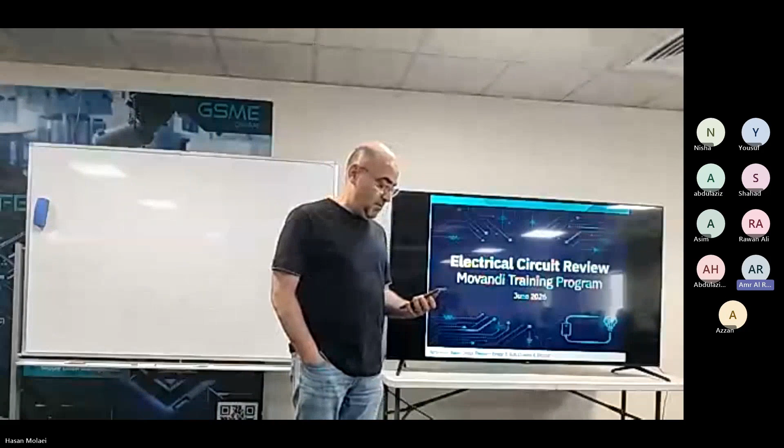So some of you, or some of the others in the group, were complaining that the speed is too much. Right? Saying it's too much work, right? Anybody here? Don't be afraid. Can you raise your hand if you believe that it's too fast?

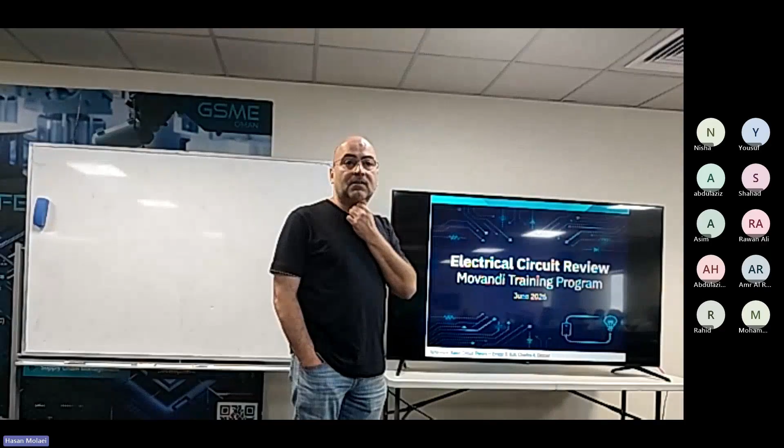Anybody who believes the way we are pushing forward is too fast, let us know. None of you think it's too fast, huh? You think it's too fast? It's okay for the speed, but there's a lot of assignments. Like, we need to recap what we took, because I graduated 2 years ago. So now I need to recap everything from maybe 2020.

Exactly. That's the whole purpose, recapping. Yeah, so I don't know if I should focus on my lessons, or solve the assignment, or prepare for the exam. There is no way to prepare for the exam before you review the course and do the homework, right? If you review the course and homework, you are prepared for the exam.

I think the assignments need to be questions for the students if they want to exercise for the exam. It's the same thing. It's about knowing the game. When you start knowing it, then you are prepared for the exam. Because there's 3 assignments in 1 week. It actually should be 5 assignments in 1 week. Last week there was only 3. It's going to be assignments for every day.

So what we can do, because remember, I kept repeating the philosophy: the purpose is to maximize your learning and foundation. Some people may want to go faster, some slower. If the speed is too much, we can probably replicate the same class. It's not about the speed, it's that the assignment has too many questions. My suggestion is one assignment with multiple questions for the whole week.

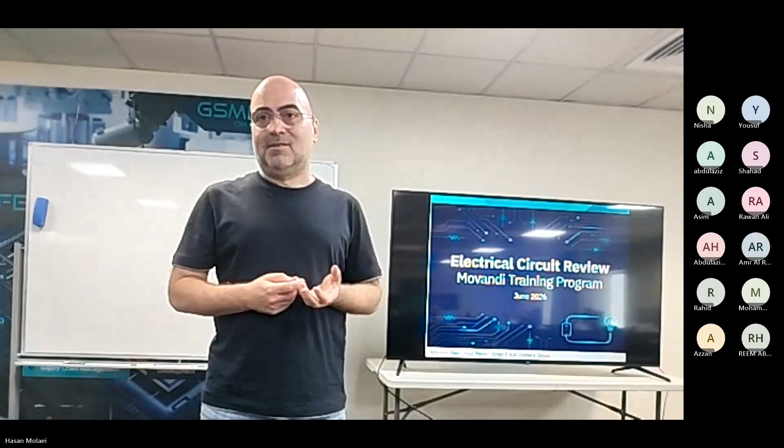So our purpose is to make sure that whatever you learn is high quality. Yes, we were planning to pack a certain amount of material in the 2 months to maximize your outcome. But if that sacrifices the quality of learning, we can adjust the speed. We also understand backgrounds are different, and people may have different levels of interest or time to attend.

Reading your messages to Dr. Hasan, I was thinking maybe we can create a slower track as well for those who want to learn at a slower pace so they don't fall behind. Of course, those who go slower will cover less material in 2 months.

My idea was that in 2 months we finish 5 general areas: circuits, basics of devices and electronic circuits, signals and systems, control and feedback, and electromagnetics. Now, if we slow down, in 2 months we will not be able to cover all of that.

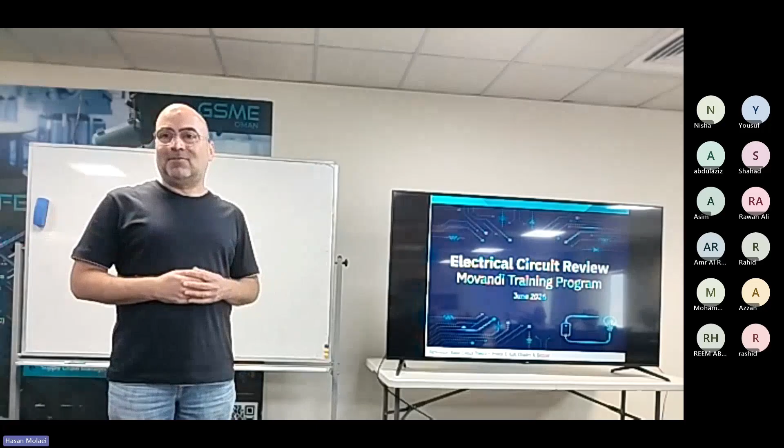But the other way is to basically give the option. The ones who want to go fast, we go. The ones who want to slow down, maybe we cover 3 topics. And then we can repeat the rest of the things for them later on, online or whichever way, if they want to read. But the whole purpose is just making sure that your foundation becomes solid.

And then later, when we go to the follow-on courses, of course, again, it's important to start on a solid foundation, but then if people don't have time to follow all of it, maybe, for example, for those who go more slowly, we finish the foundation instead of 2 months, we finish it in like 3 months, 4 months. So they may be missing the first, maybe the digital course, and then they will start with the analog course or whatever later on. So that we adjust the pace for everyone.

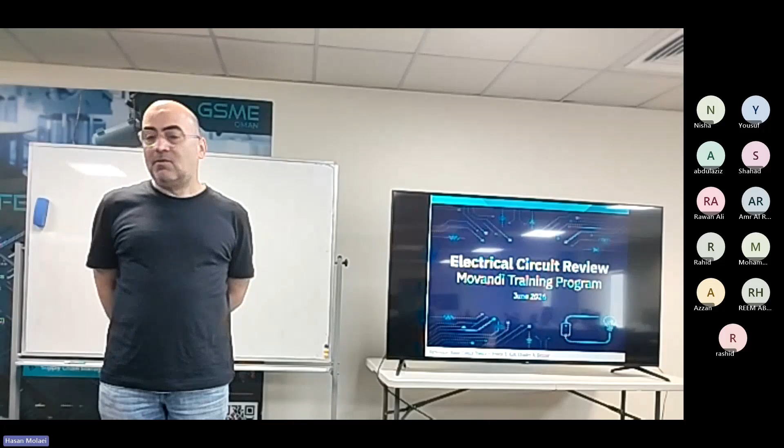That was my thinking. Now, let's say if I give you 2 options, the current speed and the slow speed, which one do you think? You go reduce speed. I want to understand what works best. Because at the end, all we care is how much you have learned. We need to balance the assignments and the amount of materials that we use.

Because if we have a lot of assignments in just 1 week, most of us will just rely on ChatGPT to solve them, and I won't. But if you use ChatGPT, you don't learn. Yeah, exactly. So 1 to 2 assignments in a week is perfect. It is not like how many topics we need for the assignment. A suggestion. You just don't do assignments.

If you're okay with this, instead of giving these homeworks as assignments, we say these are the things you have to know and you have to practice by yourself. If you have questions, come and ask. Much better. But if you fail in the exam because you haven't been able to solve the problem by yourself, because in the exam you don't have that GPT, we just give you feedback. You say, okay, first round you failed. We are happy to say, okay, go study again and come back and do another exam 2 weeks later.

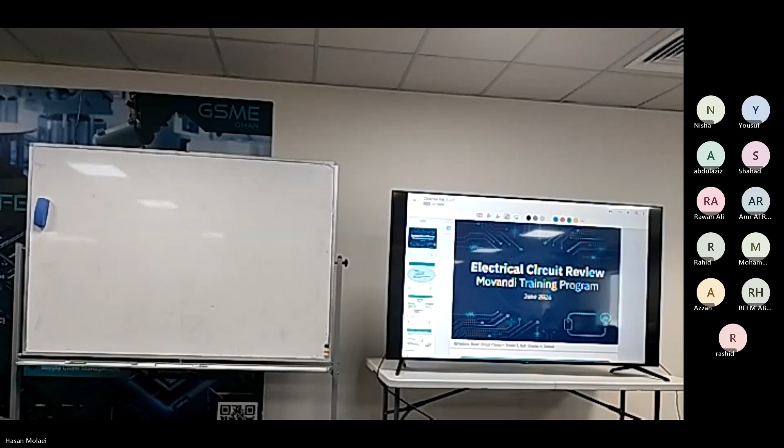You can keep taking exams until your foundation is solid, but we will not pass you unless you are able to solve the problems. Right? Because the exam is only a measure for yourself on whether you are comfortable enough with the material. Right? There is no failure. It's only success. But the success may require more time. Does it make sense? Will it make it attractive?

Okay, so moving forward, anything that you call assignment. I think we still should keep the option of assignment. So we just say review problems, and then some of them we will announce as assignment. Does it make sense? So some of them. You are happy with that? No, so some of the homeworks you announce it as assignment. Then they have to. Because we also owe you to give you feedback that you are progressing and you're doing the work.

We can make it very easy. We can say, okay, you don't need to come to the class. You can go review by yourself. It's self-learning at the end. That's okay. The class is here to help. The assignments are here to help. And the exam is there to help you measure it. We just try to remind you what are the topics that you need to know. We cannot make you know it. You have to learn it by yourself. You can explain, you can help, but at the end it's yours. Any opinion? What should we do? Yes.

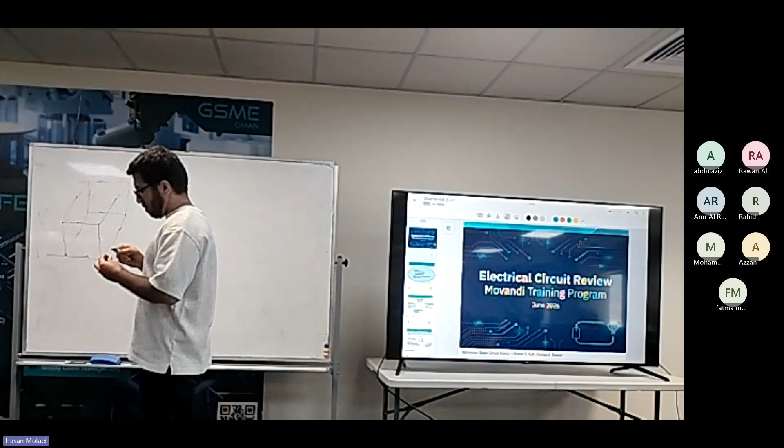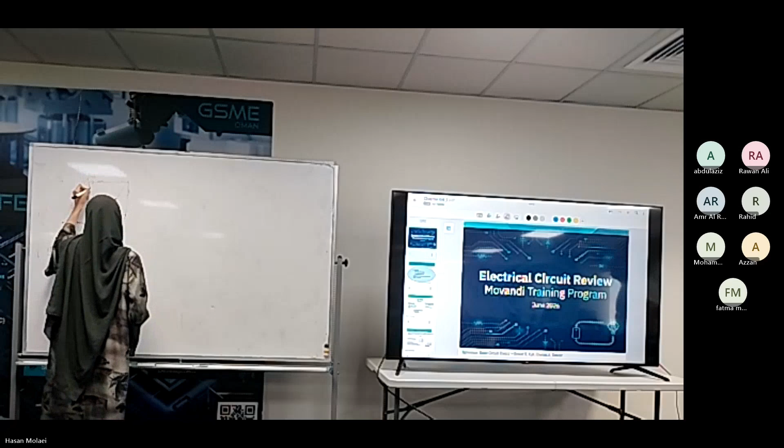That's part of the assignment. Since most of you solved the assignment and sent the answer, I want one volunteer to solve it for us. I think more than 40 people sent the answer. I want to check how confident you are. One of our good ChatGPT users, we invite you to come here and repeat what ChatGPT did. Yeah, I think we can explain that. The kinds of... all, yeah. Is it true? Is it correct?

The paths, that means the way these paths come from here to here, are they the same? Then we can easily divide the current by 3. Yeah, but you are using symmetry. How did you find that all currents should be equal? Because it is symmetric. All is equal, but you know, in the last assignment, the last step, it was here. From here to here, all these paths are here.

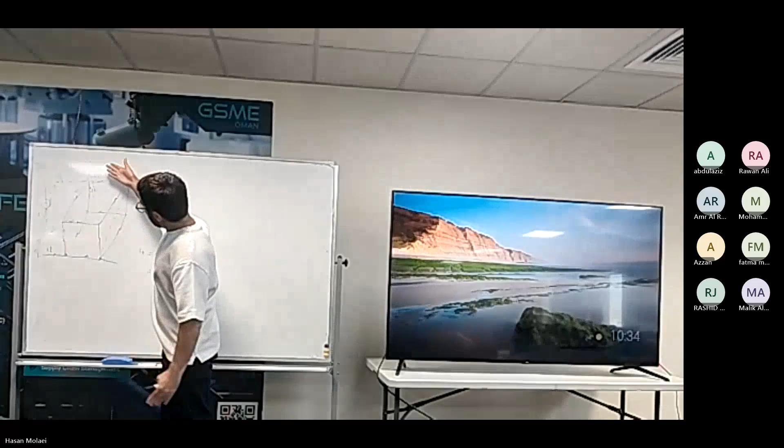This voltage be equal to this one, yeah. Because this path and this path both are same. I'm looking from this node and this, yeah. If you consider a diagonal plane that crosses this node and this, let us say green plane. I'm showing. I draw.

So in this plane, regarding to this plane, this point should be equal to this point. They are mirror. Okay. This node is mirror to this node. That means you can easily short them together because they are same, they have same potential. If we connect these two nodes together, what will happen? Absolutely.

These two resistors are, what's the relationship between these two resistors? They are parallel. I can write one here. These two are parallel, I can write R over 2. These two parallel, R over 2. This one and this one.

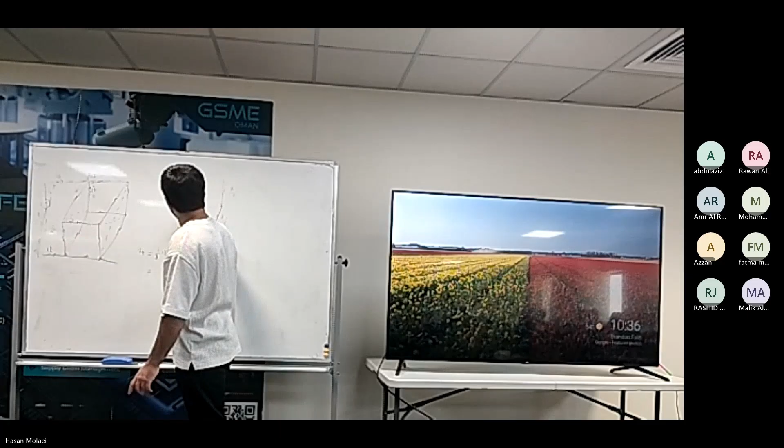Again, both terminals are connected together. They are parallel. This one and this one. Again, parallel. This one. And these two are again. Now you can find easily the equivalent resistor of how

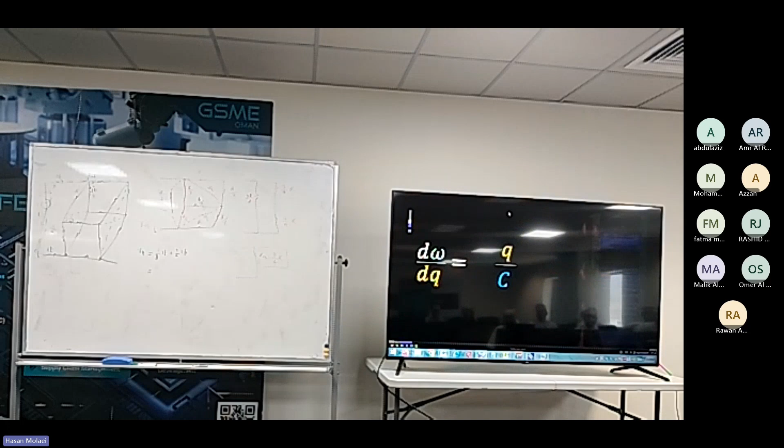You'll be able to visualize the entire process and even derive the energy stored in a capacitor. Let's jump right in. Understanding capacitors. Imagine a capacitor as a tiny

Hello, students. Today, we're not just going to learn about capacitors. We're going to feel what happens inside them during charging and discharging. By the end of this video, you'll be able to visualize the entire process and even derive the energy stored in a capacitor. Let's jump right in. Understanding capacitors. Imagine a capacitor as a tiny supercharged battery. It has two metal plates separated by a small distance d.

Keep in mind that capacitors are electrically neutral. This means that for every positive charge in the capacitor, there is an equal amount of negative charge as well. However, in our presentation here, we will only show the conventional direction of current. Let's imagine we connect a 9-volt battery to a capacitor. Here's what happens step by step.

As soon as the connection is made, the battery starts hustling positive charges from one plate to the other. Each little charge, dq, needs some help from the battery to make the journey across. Initially, at the start, the capacitor's potential is 0 volts, while our battery is a solid 9 volt. The first few charges move easily, but as more charges pile up, the capacitor's plates start pushing back, saying, hey, we're full. The battery has to work harder to move more charges, building up potential energy in the capacitor.

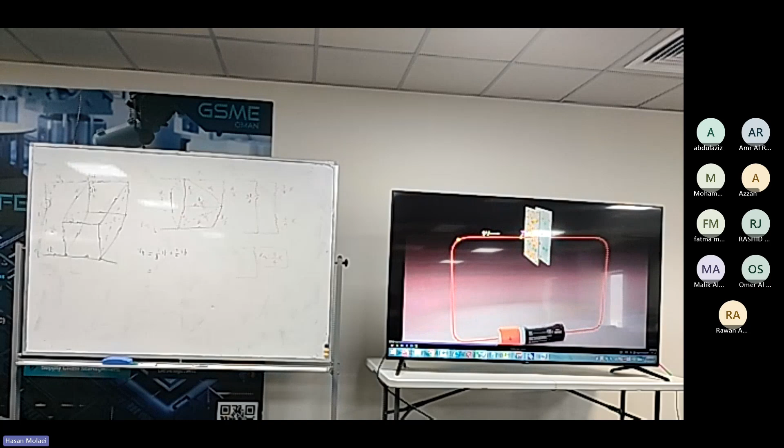If we think of the capacitor as a tiny battery, positive charges want to flow from positive to negative terminal of the capacitor, or we can say it wants to make the charge flow counterclockwise. But because the potential of the battery is higher, or rather the power to push the charges is higher, the battery will succeed in moving the charges clockwise until the voltage of the capacitor is comparable to that of the battery. An electric field forms between the plates, opposing further charge movement. This field grows stronger as more charge accumulates.

We know that the work done per unit charge is equal to the potential, which we call V. Additionally, you know that the voltage across the capacitor is related to the charge Q on the capacitor and its capacitance C by the formula that says voltage equals charge Q divided by capacitance C. When we substitute Q by C into the equation for work done, we get work done equals Q by capacitance multiplied by dQ. We know that the total work done by the battery to insert charges into the capacitor is stored as the potential energy of the capacitor.

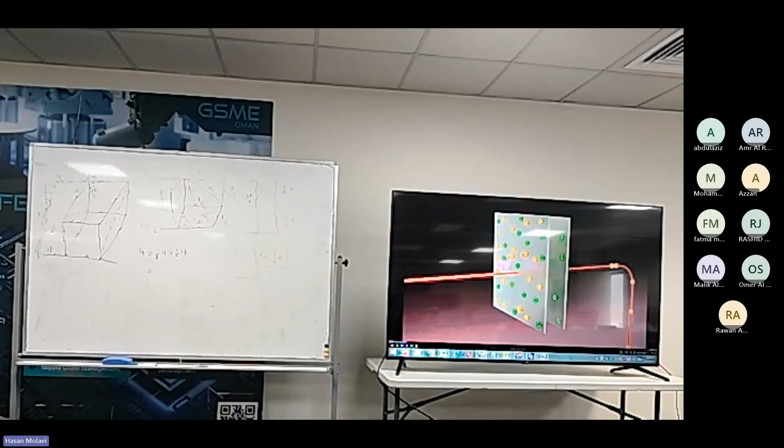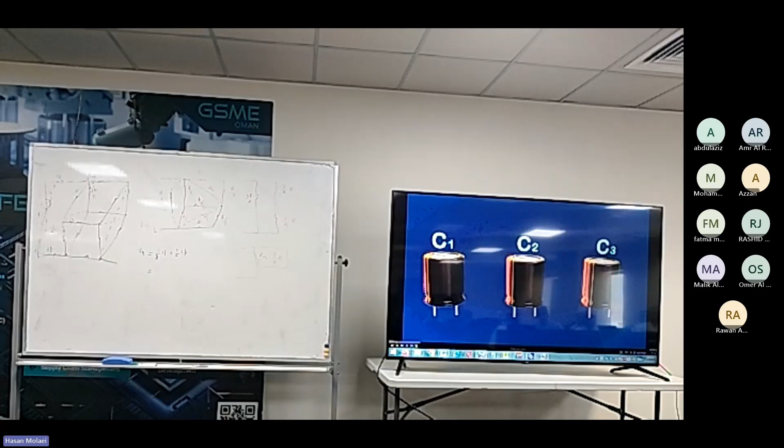In previous videos, we explored how capacitors work and their capacitance equation, but in real circuits, a single capacitor isn't enough. Devices use capacitor combinations to store more charge or handle higher voltages. Let's understand how these combinations work and why they're so important. Imagine we have 3 capacitors, C1, C2, and C3, connected in series. But what does a series combination mean? It simply means that the capacitors are connected one after another in a single path, just like a chain.

Now let's connect a battery to this series combination of capacitors. As soon as we do this, the battery pushes a certain amount of positive charge, Q, onto the first capacitor plate of C1. But here's where things get interesting. The positively charged plate of C1 repels the positive charge on the adjacent plate. This repelled charge moves away, leaving an equal amount of negative charge on that plate.

Now, the positive charge moves forward to the next capacitor's plate and repeats the process. The positive plate repels the positive charge of the next plate, making it negative. The plate that loses positive charge becomes negative. This chain reaction continues across all capacitors in the series.

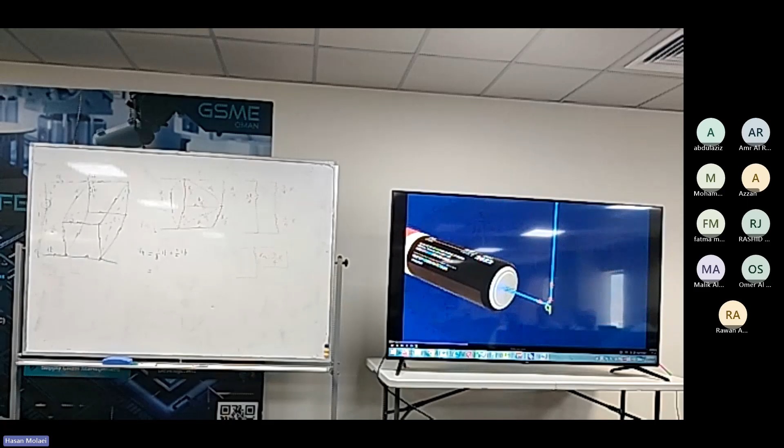Finally, when the last capacitor's plate sends its positive charge to the negative terminal of the battery, the circuit is complete. The same charge that the battery supplied from the positive end now reaches the negative end, maintaining a continuous flow of charge. This unique charge transfer mechanism ensures that all capacitors in a series combination have the same charge Q, which is a key property of series circuits.

I got a lot of questions regarding that: positive charges do not move. So here is the explanation from the perspective of electrons, not from the conventional current perspective, but from the movement of electrons, which are the real charge carriers.

The battery's negative terminal pushes electrons onto the nearest plate of C3, making it negatively charged. These extra electrons repel electrons from the opposite plate of C3, leaving it positively charged. The repelled electrons move to C2's plate, making it negative, and push electrons away from its other plate, making that positive.

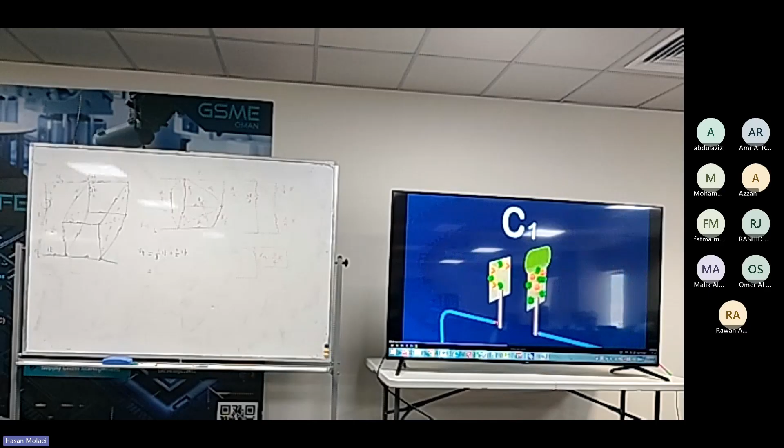This chain reaction continues. The electrons move to C1's plate, making it negative. The last plate of C1 loses electrons, becoming positive, and the freed electrons are pulled into the positive terminal of the battery. As a result, every capacitor has the same charge.

Here's an important point to note. All capacitors in a series combination have the same charge, Q. While the charge, Q, is the same for all, the voltage across each capacitor is different based on their capacitance. We can express this as voltage across capacitor C1: V1 equals Q by C1. Voltage across capacitor C2: V2 equals Q by C2. Voltage across capacitor C3: V3 equals Q by C3.

That's a series connection. The total voltage, V, is the sum of individual voltages. V equals V1 plus V2 plus V3. And here this V is the voltage or potential difference of the battery. When we connect capacitors in series, we want to find a single equivalent capacitance, CE, that behaves the same as all the capacitors combined. To find this equivalent capacitance, we start with the definition of capacitance, which is CE equals Q by V, that is, charge stored per unit voltage.

Now, in a series connection, the total voltage across the combination is this, which we have just calculated, and charge Q stored in each capacitor is the same. Just after simplifying the equation, we will get 1 by CE equals 1 by C1 plus 1 by C2 plus 1 by C3, and so on to the n number of capacitors, 1 by Cn. This gives us the formula for equivalent capacitance of a series combination.

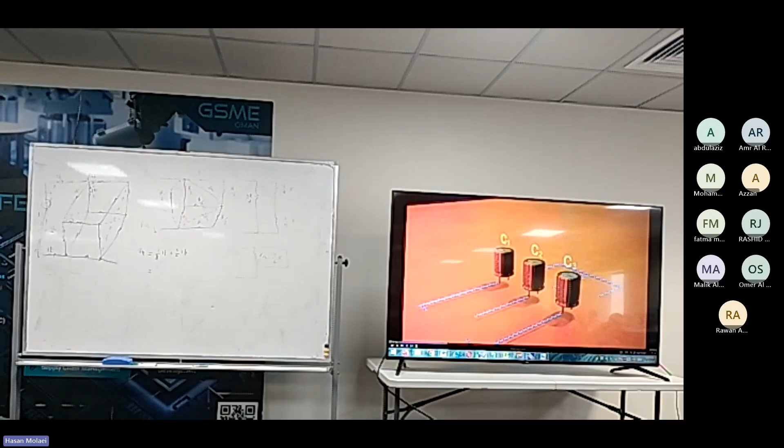All right, let's visualize how a parallel combination of capacitors works. Imagine we have 3 capacitors labeled C1, C2, and C3. Now, in a parallel setup, these capacitors are connected side by side, all joined together at one point. Now, here's the key difference between parallel and series combinations. In parallel, when we connect these capacitors to a battery, the voltage across each of them is the same. There's no voltage drop between them. This is because all the capacitors share the same connecting points, like being on the same level in a way, no matter what. Can you believe this? That means the voltage across C1, C2, and C3 will be exactly the same as the battery's voltage.

But hold on, how much charge will each capacitor hold? Well, that's where things get interesting. When the battery pushes charge into this parallel circuit, the charge doesn't distribute evenly between the capacitors. It's actually based on their capacity to store charge. As the positive charge accumulates on the first plate of each capacitor, the same amount of positive charge is pushed back into the battery from the second plate, like a beautiful balance of give and take happening inside the circuit.

The charge each capacitor stores depends on its capacitance. Just imagine, one capacitor might hold a lot of charge easily, while another with lower capacitance will store less charge. So here's the thumb rule. In a parallel combination, the voltage is the same across all capacitors, but the charge stored in each capacitor will vary depending on their individual capacitances.

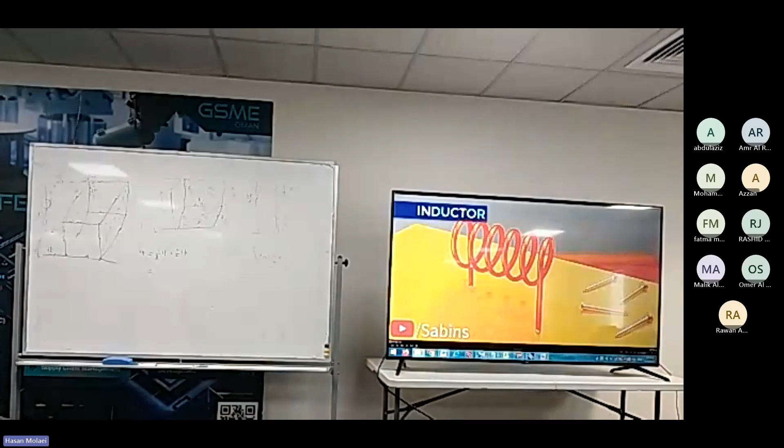An inductor is a very interesting device in that when you simply connect a DC power supply across it, it acts as a magnet. It has many applications across all engineering disciplines. Let's take a logical look at the physics behind inductors. A current-carrying conductor produces a magnetic field around it, as shown. Let's do an interesting experiment. Let's bend the wire.

As you bend the wire, the magnetic field lines interact with each other and produce an interesting magnetic field pattern, as shown. This magnetic field pattern is similar to that of a permanent magnet, which is why a current-carrying loop acts like a permanent magnet. Clearly, simply by increasing the number of loops, we can increase the magnetic flux. We can also increase this magnetic flux by increasing the current through the coils.

A constant called inductance connects the magnetic flux and the current's value. The value of inductance depends purely on the geometry of the coil. Now, for the most important part of this video, what will happen if the current through the coil changes? When the current changes, the magnetic flux that the coil produces also changes, which means we need to study the effect of this varying magnetic flux on the coil.

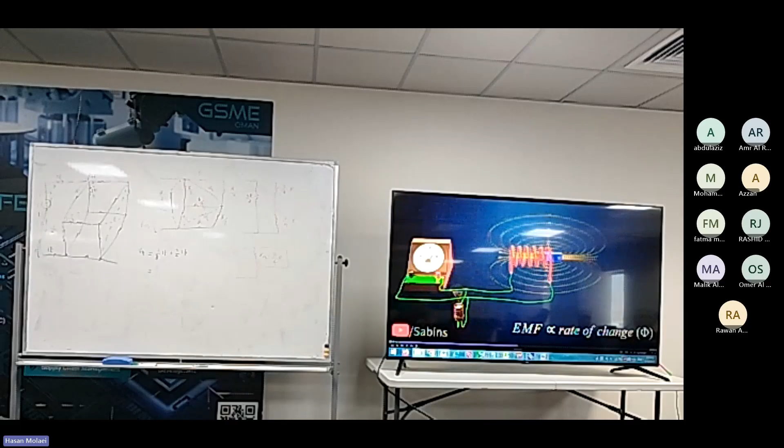To study the effect of varying magnetic flux on a coil, we need to introduce Faraday's law. The great scientist Michael Faraday said if the magnetic flux changes across a loop, it will induce an EMF across it. Here you can see that the permanent magnet approaches or leaves the loop. It will induce an EMF across it. This result occurs because the movement of the permanent magnet causes a varying magnetic flux on the loop.

Now, let's apply Faraday's law to an inductor connected across an AC power supply. According to Faraday's law, the varying magnetic flux that the AC power source produces will definitely produce an EMF across it. This EMF is known as back EMF, and this phenomenon is called self-induction.

The electricity we use everywhere is sinusoidal in nature. It's therefore very important to study the effect of a sinusoidally varying EMF across the inductor. You might have noted that in Faraday's law, everything is about the rate of change. So let's study more about a sine curve's rate of change.

Clearly, for the sine curve, the change is zero when the current is at the peak, and the change is maximal when the current is zero. This is one interesting property of a sine curve. The EMF it induces is proportional to the change in current. Therefore, the EMF across the inductor is zero when the current is at maximum. And the EMF is at maximum when the current is zero.

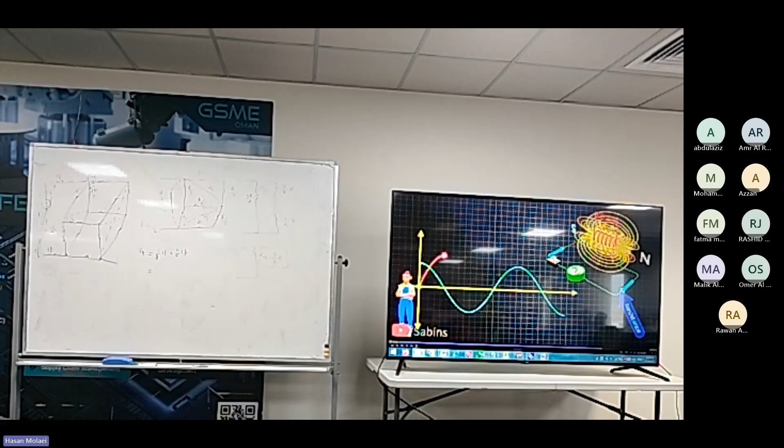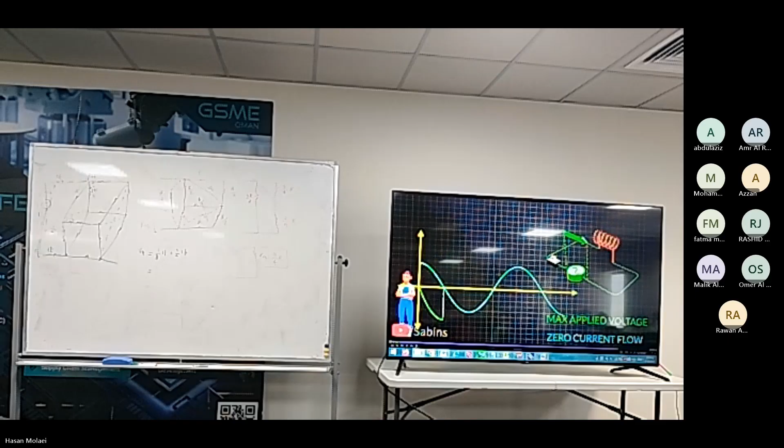In short, the back EMF will vary as shown. If the resistance of this circuit is negligible, the EMF induced across the inductor should be equal to the applied voltage, but opposite in sign. So the applied voltage also has the same variation with the current. When the applied voltage is maximal, the current through a pure inductor circuit will be zero. And when applied voltage is zero, the current flow through the circuit will be maximal.

In short, when a sinusoidal voltage is applied across a pure inductive circuit, the current will lag the voltage by 90 degrees. This is a crazy behavior. However, using the fundamental laws of physics, we have explained the reason behind it. We hope you have developed a good conceptual understanding of inductors.

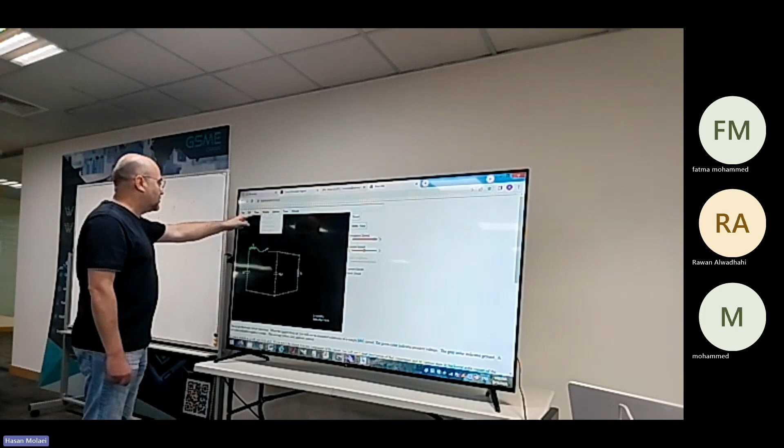Can someone search quickly, see where you can actually create how to plot the? You have to select the. Where's the plots? We should be able. Oh, it's here. So go to the draw. I just saw the voltmeter. Let's start from the beginning. So here there is no sub menu. Let's start from passive components.

You see a voltmeter here. So let's go to inputs and sources. Of course, should be here somewhere, right? Then go to outputs and labels. See, they have ohm meter, they have watt meter, amp meter, right? Oh, okay. So add a voltmeter and amp. Okay, here, add voltmeter. Put a voltmeter here. This one should be zero. Connect it the other side. So one side to the one side.

Put it vertical. See that, yeah. So you see, one of the things that you also have to become good at is drawing circuits. You have to see the circuits and see how they are, follow the standards. You basically have to put it vertical. Okay, put it in. Connect this side, this side, this side. Up to here, bottom. Right. Remove them there.

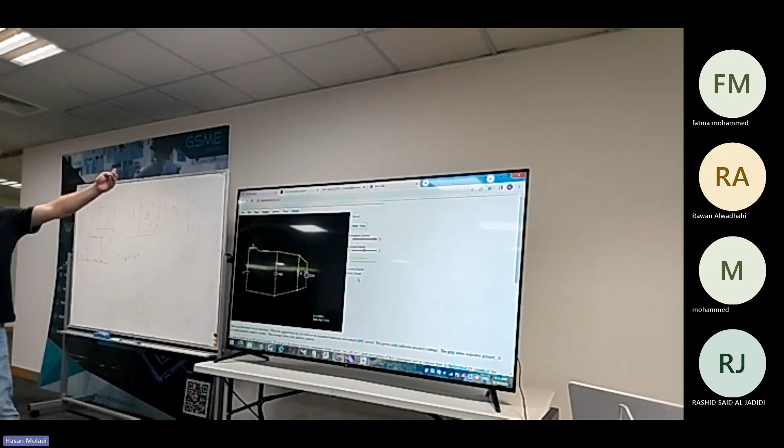Okay. So this one, I'll click on it, see what is the option that it says. Voltmeter. Series resistance. That's good. It's scale auto. Okay. Apply. Fine. Let's run it again. All right. So this voltage, see, arrives at 0. Right? Now close the switch. It goes up around that too. Right? So reduce the speed now, so you can actually see it, then you can come back to plot it.

So okay, let's do it again. See, first of all, the voltage is coming up gradually. Why is the voltage coming up? This capacitor is getting charged. While it's still getting charged, there is still current going. But when it reaches 2.5, you will see the current here totally stops. All the current will go from there. From theory, we could understand that at the end, when it reaches the full voltage, the current is going to be zero. KCL here says the whole current that goes in goes out. So basically it becomes like just two resistors in series connected to a source. See, 2.2, as it reaches 2.5, it's going to be slower and slower.

So what was the time constant that you calculated? 10 milliseconds, right? Now, the actual charging time constant here is not 10 milliseconds. You know why? There's another resistor as well. So what is the time constant of this circuit? From the capacitor's perspective, it's as if two resistors are parallel to each other. So we actually have 5K resistors. So the time constant is 5 milliseconds, not 10. So you want to make it 10 milliseconds with this topology. How do you do it? No. Each of them increase it to 20K.

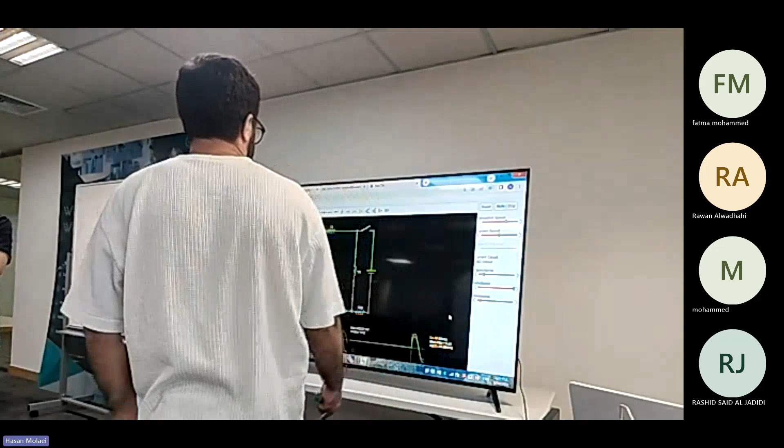So Sakar was coming to me asking that, oh, we already know all of this, I want to go practical. Fine, but it's pretty much like driving, right? You can say, in order to drive a car, you open the door, you sit inside, close the door, turn on the car, press the brake, put it in gear, push the gas pedal and go. Okay. But that doesn't make you a driver. You have to practice to be able to do all those things quickly. So same with setting up the simulations.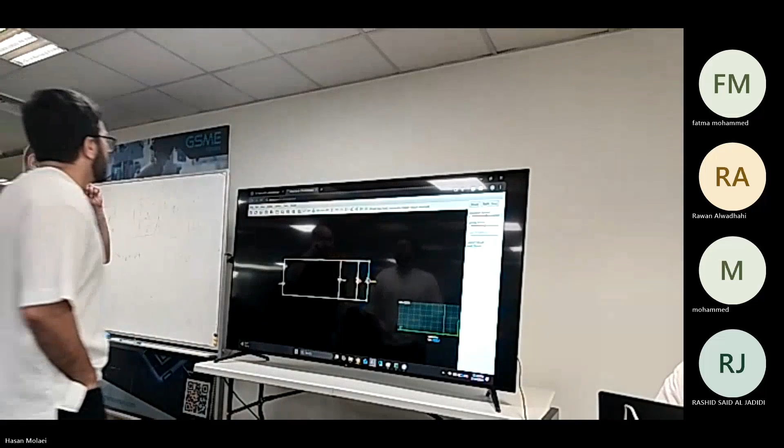This is not what we wanted to show them. It's too complex for them. You just want to understand how to copy the plots. How does it do the plot? Show values. Show options, show values. Yeah. Working with that. Found it? You have the menu up there as well. Too many options. Browser setting as well. We need to be probably just on the toolbar, but we need to see the values. You had the plot there, right? Yeah, only for the first one, that's the only way to show. But how do you establish it to stay?

Good. So now we have a 10 millisecond time constant. Turn off the switch. Then turn on the switch. Please. Reset and start from fresh. Okay, turn off the switch first. Oh, actually, reset. Okay. So now start. First of all, you see, let it deplete. See, it's going down. So we have to speed up the simulation so that you don't have to wait. Go a little faster as well. Okay, good. Now switch it on.

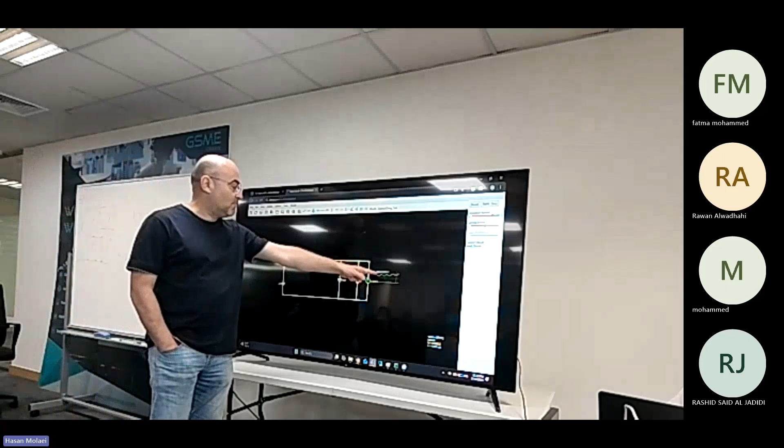See? Now switch it off. Now switch it on again. Now switch it off. On again. Off. Now keep doing it faster. On, off, on, off, on. Now try to keep it around the line 1 by switching on and off. Bring it down to 1 and keep it around 1. Don't let it go down. Your job is going to be keeping it around 1 with minimum divergence. You're going too high. You're slow. Do it faster.

This is what is called a switch mode or switching power supply. You get DC-DCs, or sometimes AC-DCs. If it's a DC-DC, let's say you get 5 volts. You say, okay, this 5 volt, I want to control it to be exactly 3. So you connect it to the 5 volt battery. On the other side, you maintain it at 3. If it goes below 3, you connect, it comes up. If it goes above 3, you disconnect, it goes down. You keep switching it on and off so that it remains around 3. And you can control it at 2, at 3, at 1.

These phones all have switch mode power supplies. Why do we bring down the voltage? Because of the chipsets, for example. The battery of the phone is 4.5 volts, but on the charger it can become 5.5. The best operating voltage for many of the chips is 1.8 volts. Sometimes you want to bring down the power, you bring it down to 1.4 volts. So you need a variable power supply on the chip, but you can only have one battery. The battery is 4.5.

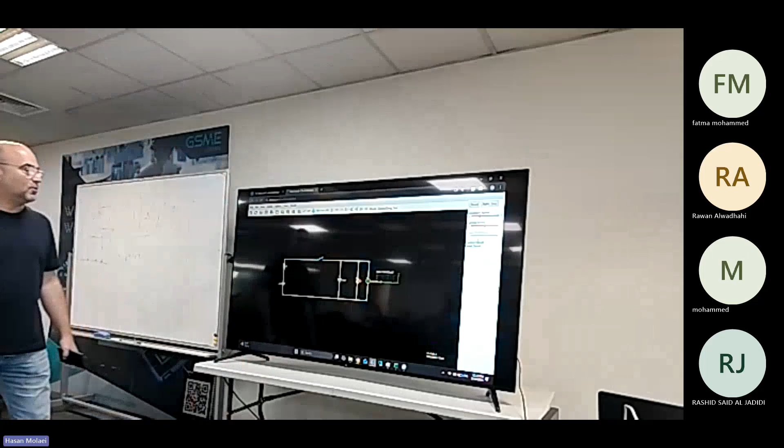If you make the simulation slower, you can show better how you can do it. Make the simulation slower. Now your job is to control it around this line that you see here. Don't let it go too much above. Set and start. First, it has to reach there, right? Okay, it's going up. You have to bring it down.

You went too much up. Up, down. As you see, it's starting to go below the line. Now this is too slow, but it's okay. You can come. Off. Let's arrive at the line. You let it go slightly lower and then you turn it on. Now you turn it on. Off.

And so on. So actually, if you become good at that and you are fast enough to detect it, then you minimize the ripple around that. So these time constant things are important. Now, let's say, for example, we remove this. Make it 0. Make it 0, okay.

Reset, run. Close it. See, it jumps to the final value immediately. When you close it, it jumps to the final value immediately. It was 0, jumped into the final, right? Now you switch it off. What happens? Shouldn't it go to 0? And the capacitor.

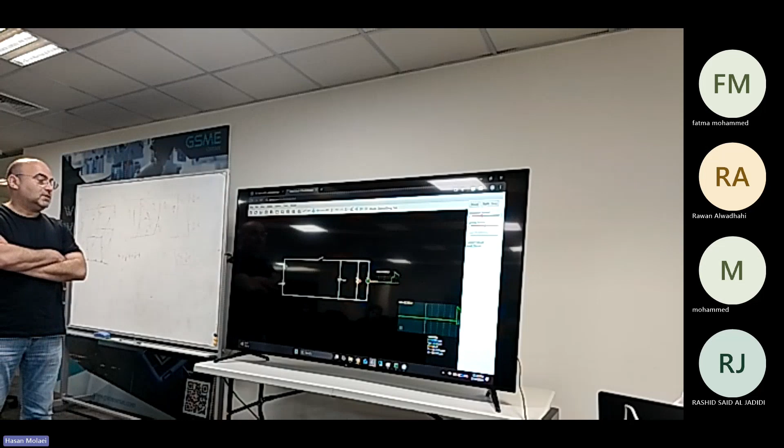The capacitor should be, so this is microvolts right now. This is empty, right? Yeah. This is empty. So now switch it on. So it's 5 volts, right? Now turn it off. The voltage jumped up. What happens here? The capacitor was charging. How did the voltage jump up? It shouldn't. What did it do? Why?

Because in order for the simulator to be able to converge, you have to put some realistic values. In order to put realistic values for the switch, you actually have inductances there as well. Hidden, you don't see. They model some internal inductance. And therefore, when you suddenly switch it off, it jumps up. When you go to zero, it actually creates the value. It's going to be very bad.

But let's say, for example, instead of 1 nano, put 1. The jump that you will see. Right now it's off, right? It's in the micro, right? So do it again, so 5 volts, right? Fairly quickly. Now, turn it off. Now it doesn't jump.

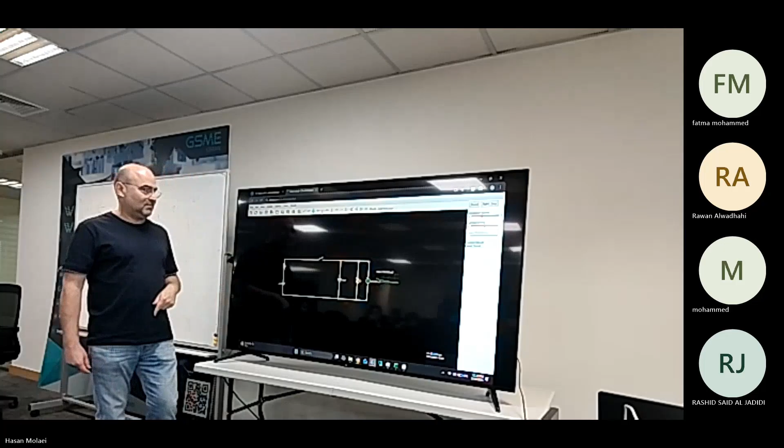So I hope after this session, at least you guys don't say, what is this circuit theory bullshit? We are wasting our time. No, circuit theory is the key to electronics. Everything is running around circuits.

Okay. 1 Henry is very large. So if we want to put some amount of it, how much we will... here, I want to put a series inductance here. We are talking about a 10 millisecond kind of time constant, right? So what is the time constant of an inductor? How much?

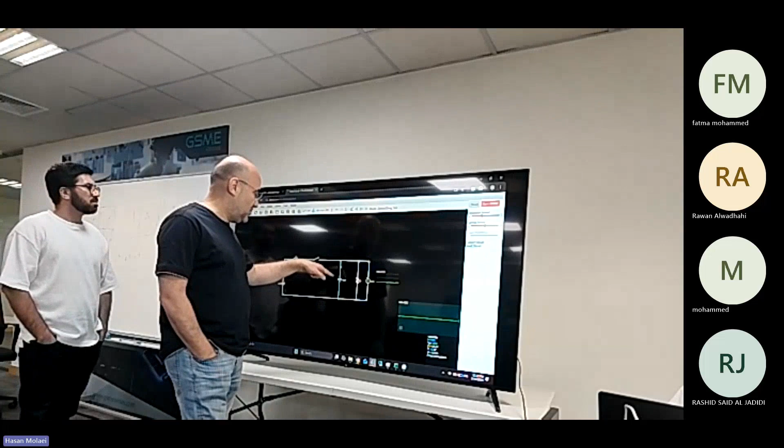Let's simplify this circuit. Come here and disconnect the capacitor for now. Keep it somewhere. Yeah, that's good. We have 1 henry, right? This is 1 ohm. That's 2 kilo, right? Let's run the simulation, see what happens. Okay, now the voltage there starts going up, but it takes time to go up. Run the simulation a little more slowly.

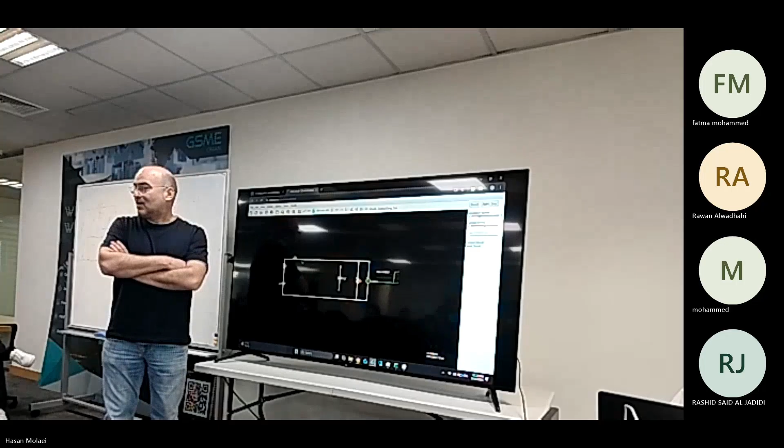How much is the time constant? You already taught this. Is it R over L? L over R. So the time constant is L over R. 1 Henry over 2K becomes how much? Half a millisecond. So we want to increase it to 5 milliseconds, right? How do we do it? L over R, right? 10 Henry is too much. So the 2K goes to 20K.

What happened? All right. Reset. It's already at 5 volts. Slow it down. The time constant is what? Did I do it right? I increased the resistor. By increasing the resistor, L over R is reduced, right? So if you want to increase the time constant, you have to reduce the R.

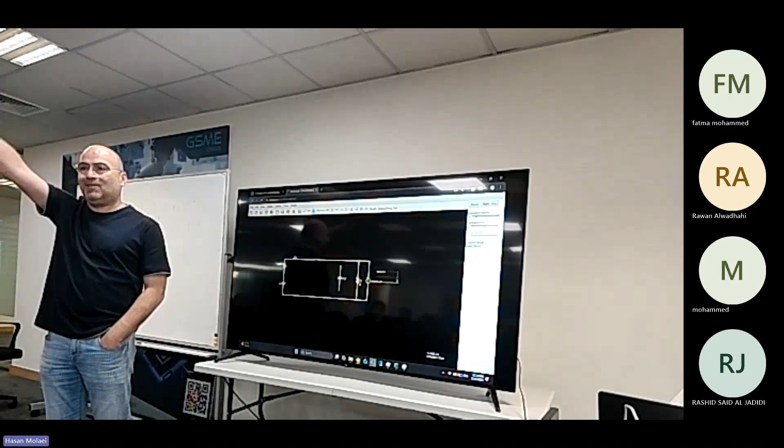It's intuitive actually. Inductance resists the change in the current. If you reduce the resistance, that means you want to get more current, so the inductor will resist that change more because there's more change in the current. If you increase the resistor, you need less current, so the change in the current becomes less important. So we have to go the other way around. Instead of 2K, go to 200 ohm.

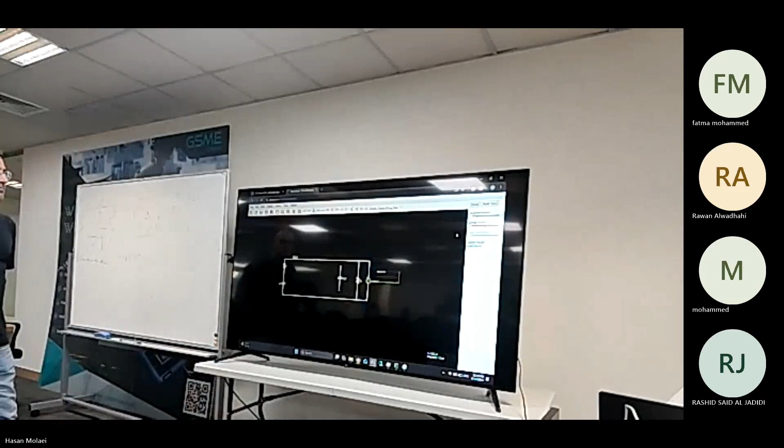But better than that, let's keep our 2K, and this capacitor, make it 100 nano. So you have to put 0.1. Now reset and run. So the time constant should become what? It was close to 5 already. So turn the switch on, turn it off. What happened? 0. Quickly, or reset.

Let's try. It's running. Turn the switch on. It's coming up very fast. But it doesn't start at 0, huh? Why didn't the plot start at 0? Now turn off the switch. The voltage has to become 0. Switching to 0 doesn't take time because there is nothing that slows down the change. It's only a resistor, right? So it quickly switches to 0. Now, if we add the capacitor,

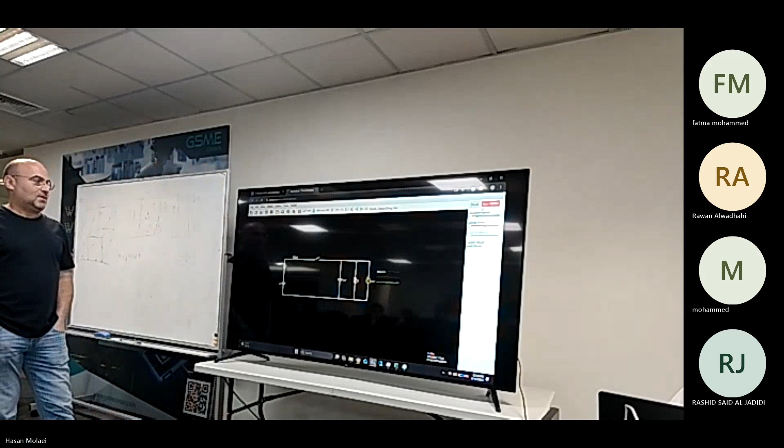then switching to 0 is going to take time. So let's do it again. Reset and run. Open or close? Let's start with open. So we are at almost 0 at the beginning, right? It's micro. And by the way, for a simulator, 0 is an approximation. You cannot be absolute 0.

So they define thresholds. When you run the simulator to reach the steady state, you define what variation you will accept as steady state, because otherwise you need infinite time to arrive at 0, and you don't have infinite time to run the simulation. So 0 is approximate, full voltage is approximate. In engineering, that approximation is important. You see this is still around 900 microvolts. 1 millivolt is considered 0 for this.

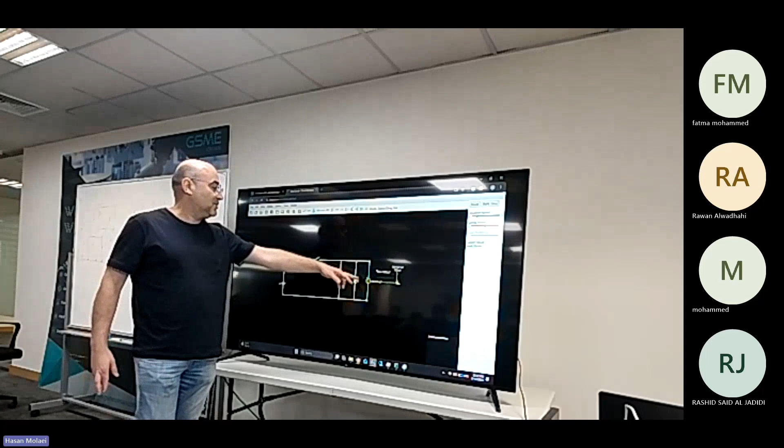So now turn the switch on. What happened? The voltage starts going up. Make the simulation speed a little faster. Yeah, faster. What's happening here? What do you see? Alternating. Make the simulation much faster. Go to the maximum speed. See, finally we arrived at our 5 volts.

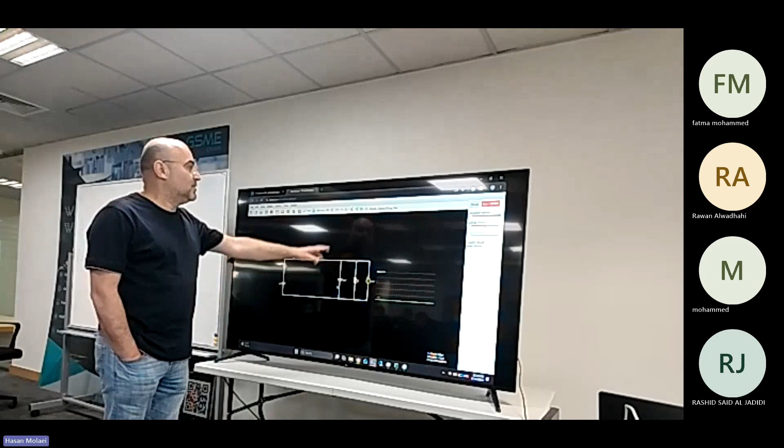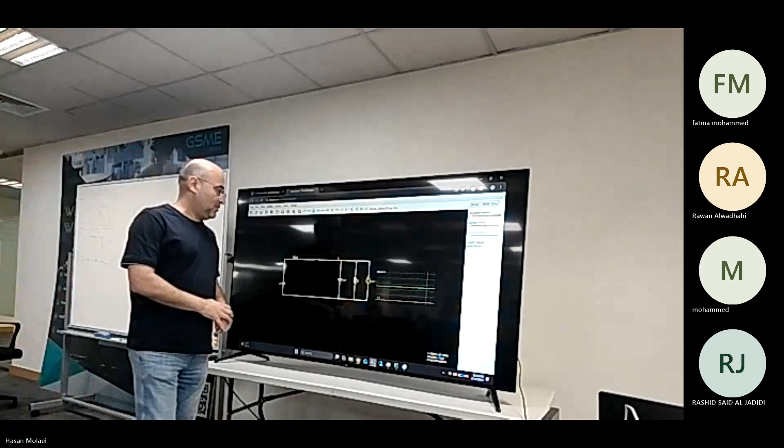Now turn off the switch. Takes time to calm down, right? Now let's do it again. Reset. Start at 0. Run first and then turn on the switch. Keep it fast. Turn on the switch now. What happened? We actually had these large oscillations, and then it started damping and slowing down. So you have those large oscillations.

Maybe slow it down a little bit. Let's run again one more time. Reset. There is a reason I repeat, because even for me, I have to see how it behaves to understand how I can change the parameters to make the thing work.

The purpose of all these courses we do is for you, when you see these circuits, to be able to intuitively understand what you should change to make it happen the way you want. Because you start saying, okay, I want to build an oscillator at that frequency. Oh no, this is too fast. Now I want to bring it down. How can I do that?

So this is what is called settling time: how long it takes for these oscillations to damp. Why do we have the oscillations? Because you have the inductor and the capacitor. The inductor resists the change in the current. The capacitor resists the change in the voltage. The combination of the two are opposite of each other. So basically it creates a second order differential equation, which creates two poles with real and imaginary parts. The result of that is an oscillatory behavior with some damping.

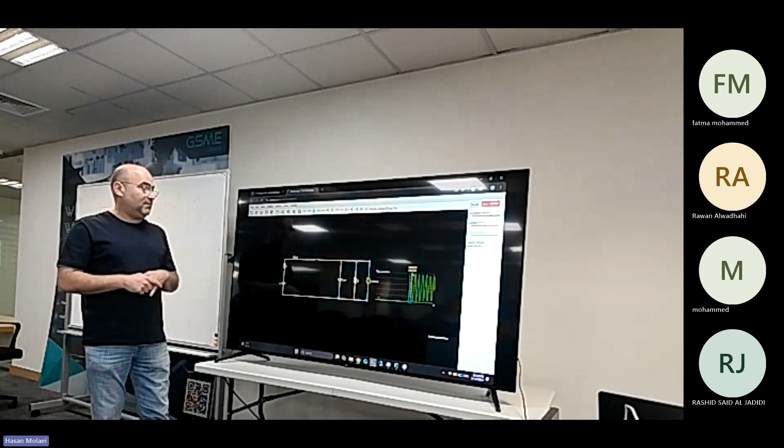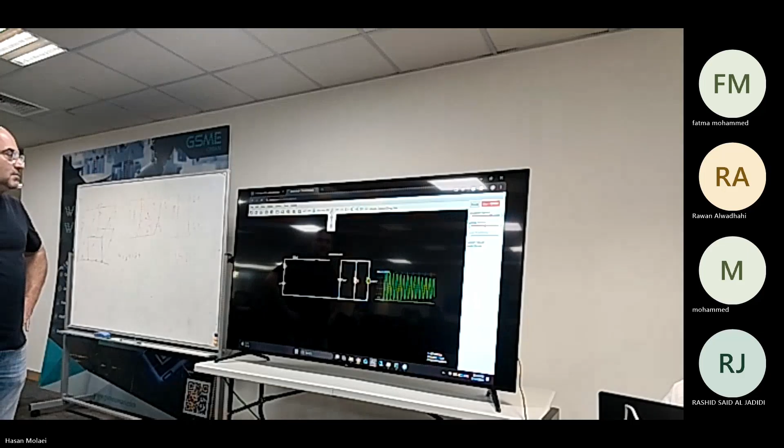Let's say, for example, we add a diode here, after the switch. Okay. Let's start with this and see what happens. This doesn't allow the current to switch back easily, right? So what happens here? Now, he understood that nothing changed, because you are putting a diode parallel to a wire. Anything parallel to a wire becomes what? Wire. Sure. So what happens here? Let's try again.

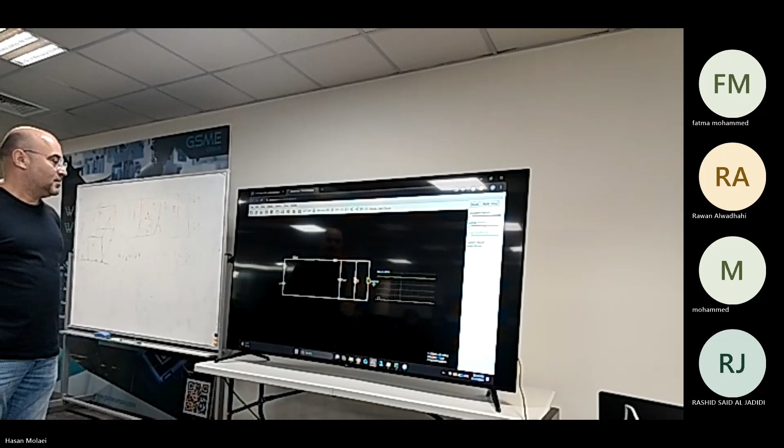What do you see? It is going down, but it's going down slowly. No, it's not going down. It's connected because it is now connected. Right? The 8.4. Why 8.4? Now, if you turn off the switch, what will happen? Starts coming down or not? It's going down, he says.

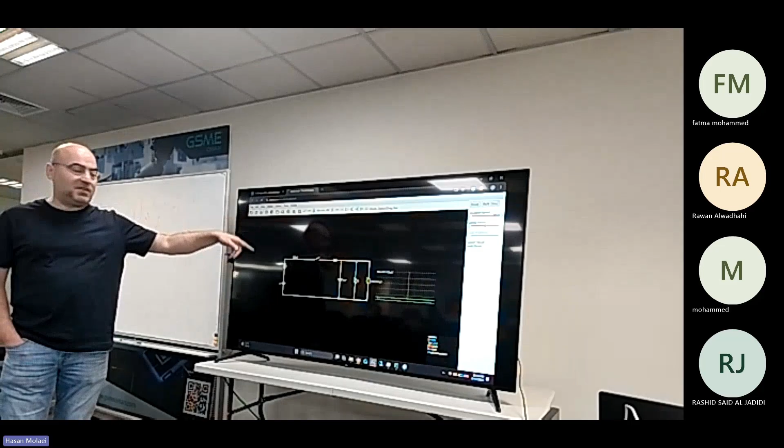So some of these corners with ideal devices, particularly for simplistic simulators like this, push the simulator out of the convergence region. And if it doesn't converge, your results are bullshit. That's why you need to know the foundation, to understand when the simulator is bullshit. Otherwise, you get mistakes.

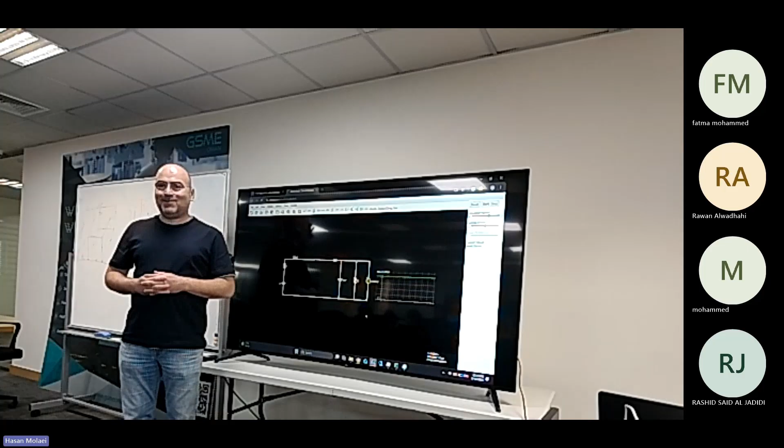There is an old joke that Joha, or Mullah Nasruddin, at the beginning of Ramadan, decided every day he would throw one stone in the well, so that anytime he could bring up the stones and count which day of Ramadan we are in. There was a boy there who wanted to have fun. He went in and threw a bunch of stones in the well. Joha had guests, and they said, okay, so which day of Ramadan are we in? It's easy, I'll go and check. Then he came back and said, today is the 47th day of Ramadan. They said, what are you talking about? Ramadan maximum is 30 days. How can we be on the 47th? He said, what are you talking about? I even discounted half of it for you.

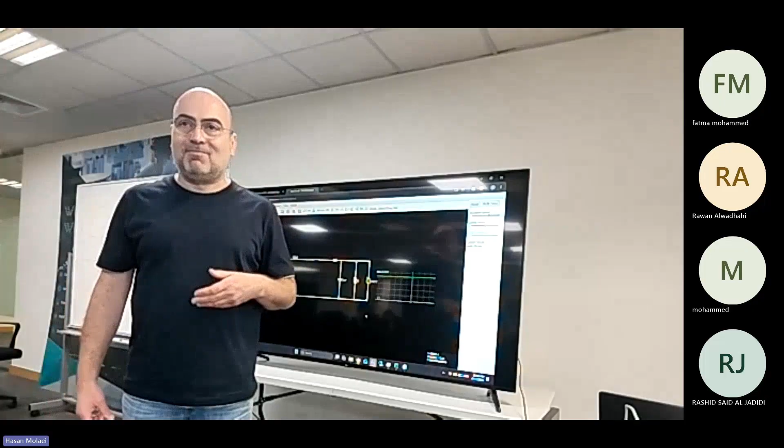So relying on a tool that goes out of range or is corrupted, without the knowledge, will lead us to the point that we may come back and say, because our simulator is telling us, we are on the 47th day of Ramadan. And you may even apply some wisdom: the simulator said we are at 94 days, so, okay, say 47. It's wrong. So you have to be able to detect what's wrong and what's right.

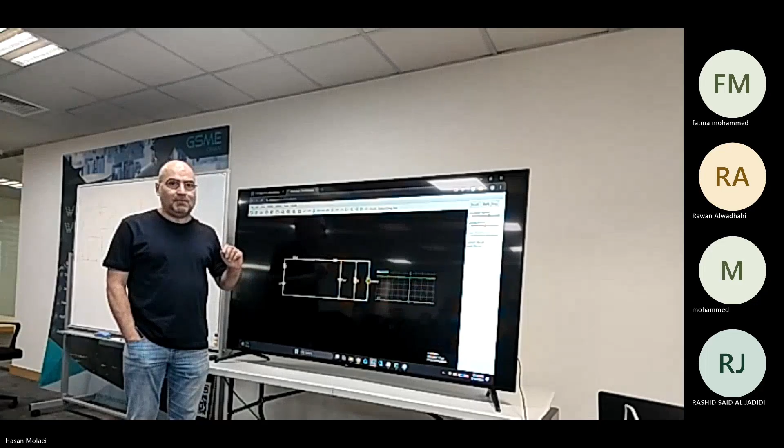Okay. So we don't know this one. We don't have time to go debug this one now. So remove the diode for now, because that's not the lesson of today anyway. The lesson of today was the time constants. And let's run it again. So you see, it jumps up to almost double. 5 points. If you increase this one, what will happen?

You see, now let's go back to the 2K. So basically, the RC on every side is appearing balanced. Let's change one. Let's reset and start again. You can increase the simulation speed. It goes up, reaches the 5, right? It takes time to load. Now, switch it off.

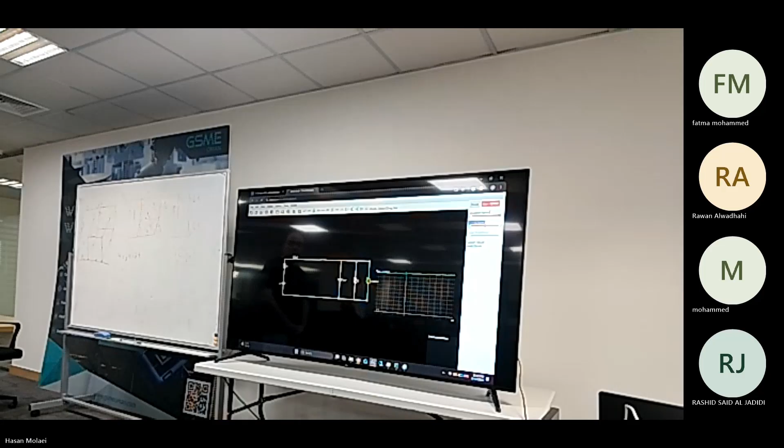Why doesn't it work? It is coming down, right? Yeah, but it's coming down very slow. So reduce the simulation speed. So why is it not coming down that fast? So we are 10 micro, 2K. 2K, 10 microfarad should be okay. Maybe the resistor is not connected. See? That's another thing. So it's not connected.

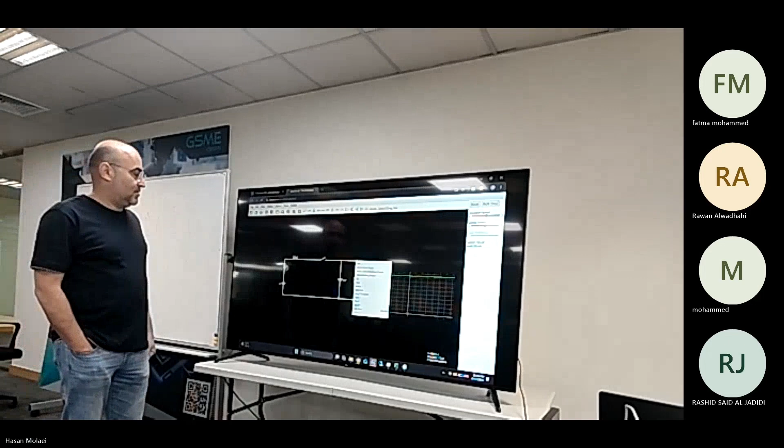You want to play safe, you always put the resistors and then this is not connected. Remove the resistor, or add wire to the 2 sides. Now, put it in the middle. Now add wire. This is one of the things that people suffer a lot in the simulators before they figure out whether these connections happen or not. So you have to be able to detect whether your connection is there. Okay, let's run again. Now switch it on.

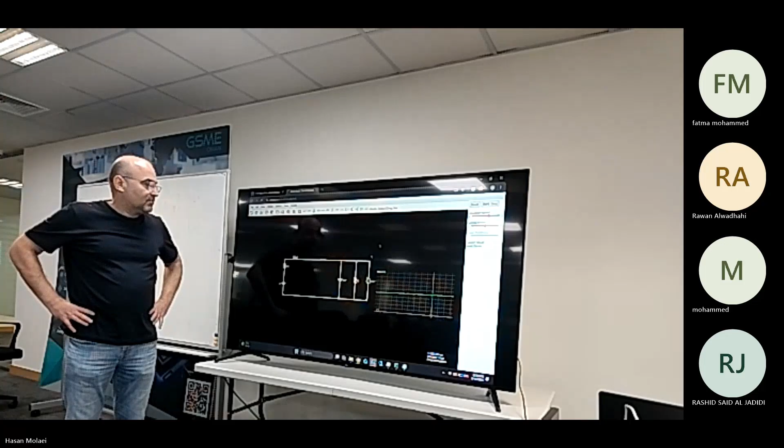So the 2K here, so remember, if you have an inductor, it actually creates an imaginary impedance. Are we teaching that? Hasan? Not yet. So extra. Effectively, it's like a resistor, but the value is imaginary. But anyway, now the dominant value is the 2K. Now, if we reduce that, make it 100 ohm, we should see the behavior change. Reset and run again. So you see now what happened was it came up, jumped up, and then came down and settled. Right? Switch it off now.

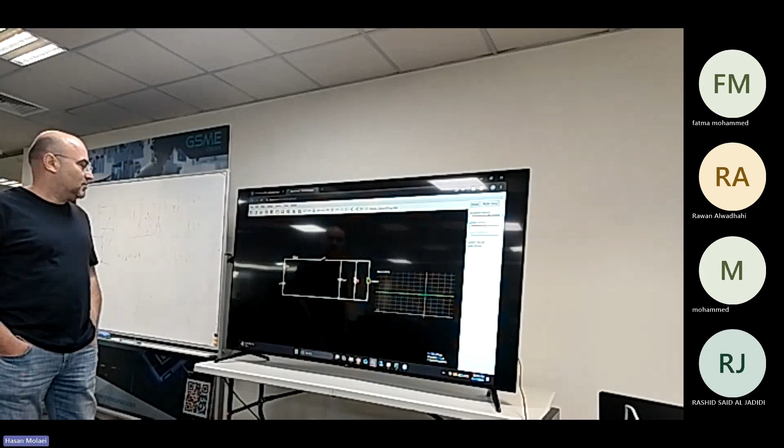Switch off doesn't work. Resistor is not connected at the beginning. That's a resistor, I think so. Also at the bottom, but when it's red, it's not connected. So you have to connect it. So let's do it. These experiments you can do by yourself as well. See, now it's coming down, right? So now switch it on. See, came up and settled, right?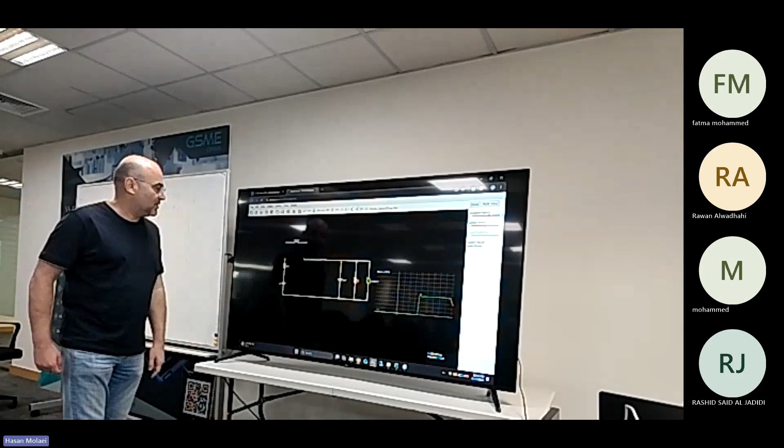If this inductance is not there, remove the inductance, you remember? Reset and run. It just comes up and gradually settles. When we add that inductor,

turn off the simulation first because the poor guy is running in the middle. Have some compassion for the simulation. Imagine it's your friend.

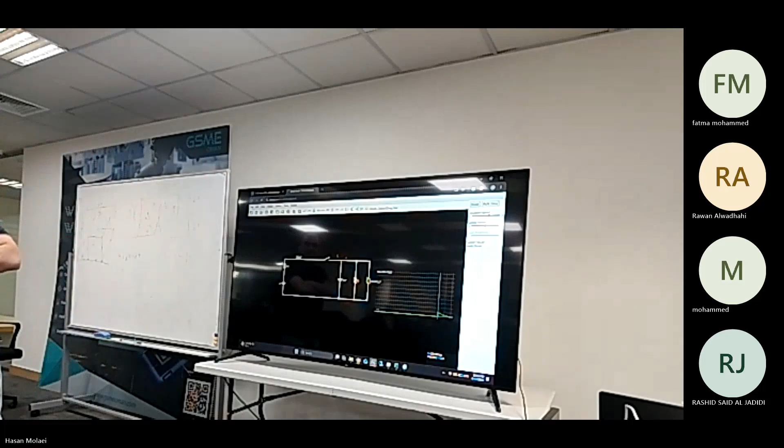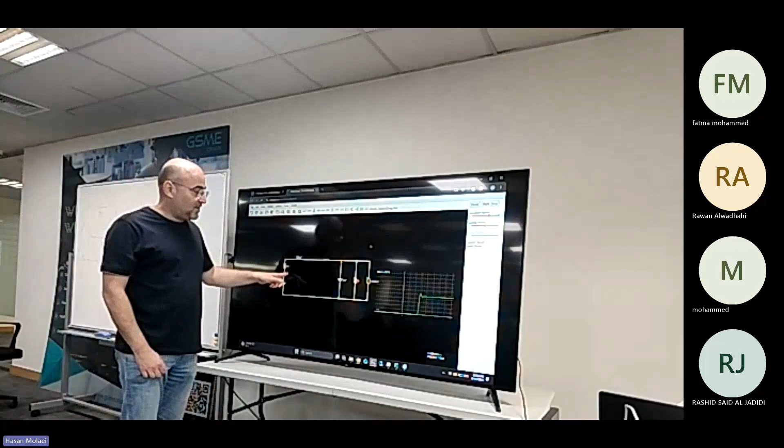Okay. Turn off that. Reset and keep the switch off. Run it. So we start at 0. Now switch. See, now we have this slight spike, because this inductance is now small, but starts having effects. Now instead of 1, make it 10. See? It is settling roughly around that. Now, why is it settling around that?

Stop the simulation. Without using any simulation, if we look at that, we say in a steady state, this capacitor will reach the final voltage and it will be open. This inductance will reach the steady state and will have some current, but it will have 0 voltage across it. So the voltage here becomes 0, here becomes open, we can remove it from the circuit. So if we want to write KVL, KCL, we have 5 volt, we have 100 ohm, we have 1K.

Right? So the final voltage should be 1K divided by 1.1K times 5. 1 divided by 1.1 times 5, 4.545. Which is the final thing that you can calculate, right? So these capacitors and inductors in this set just create those transients. Now, instead of 100, I make it 1K. The final voltage should be what? 2.5. That creates more variation. So now let's see what happens.

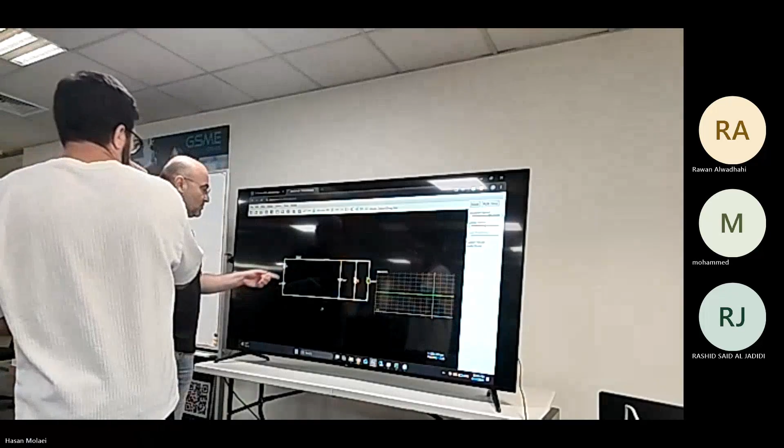Right? So if you put 1 Henry, so if we want to create, Hassan, with LC, like the 10 millisecond kind of a thing, how many Henrys do you need? 10 millisecond. You're thinking about who dominates. Calculated. Okay, put 1 Henry. Put 1 ohm here. And this one, make it 20K. So what we did here was we made the charging fast.

We basically also made the discharging slow. Right? The capacitor discharging, if this resistance is higher, the RC is increasing, it's going to be slow. But the discharging of this one is fast. So let's see what happens. Reset that one. See, we started having those oscillatory behaviors that will arrive at the 2.5 volt.

By the way, combinations of L's and C's, we use them for creating resonances. These resonances create opportunity to create oscillators, create filters, because you can tune the frequency of them. You want to speed this frequency, for this to happen faster, right? In order to make it faster, you have to reduce the L and C. So we can reduce the L, for example, say 0.1.

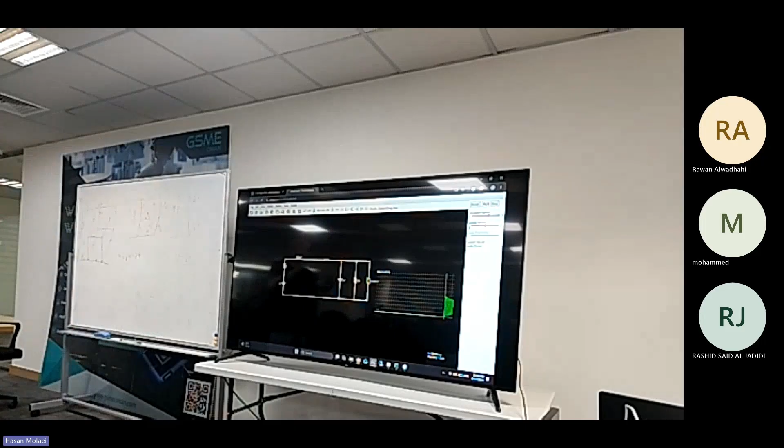Let's run again. Let's run it. Switch it on now. So see, we increase the frequency. Want to increase the frequency further? The 10 micro, also make it 1 micro. Do it again. Became much faster. Right? But at the end, it still settles.

Why? Because we have those. If this one becomes very high, this one becomes very low, the settlement becomes much longer. So this one, make it 0.1. Or make it 200. Funny. So now switch it off. You're at 2.5. Now connect it again. What happened was I didn't show there. So that's a 200K, not 200.

And these kind of errors in the circuit, when you are designing circuits, happen all the time. You're typing in 200 instead of 200K. Now, if you do not know your theory to go and understand what went wrong, you may spend 3 days in a complex circuit to figure out what the hell went wrong, but it's not behaving properly.

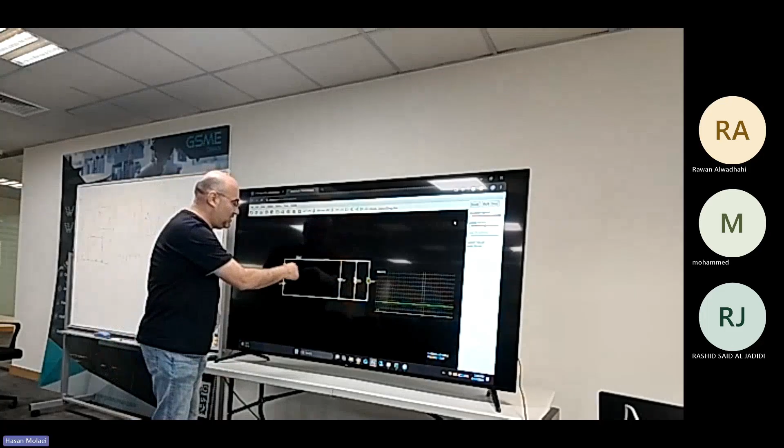So see, the frequency of oscillation is high, but the damping is very slow. It is coming down. This peak maximum voltage keeps coming down, but very, very slowly. Why? Because we do not have those resistors that actually absorb the energy and kill it. So if you have an RLC in parallel, the R that is in parallel absorbs the energy. We have the RLC effectively. But if you look at the RLC in that, the damping that we have is very little.

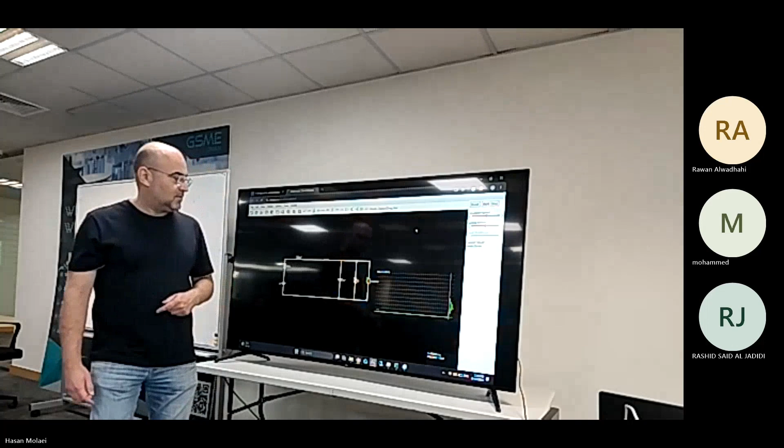Now we want to damp it faster, make it like 2K. Got it. See, the frequency didn't change, but the damping became much faster. So these are the kind of things that you can do.

Now, if you have some electronic circuit, a rectifier that would catch this high voltage every time that you switch, then you can keep switching, and every time you catch, you can keep increasing it. That's how you can actually generate a voltage higher than what your battery is providing, the DC. That's called a boost converter. That kind of converter boosts the voltage. If you want to just reduce it, just capacitor circuits together, that is enough, you can reduce.

So you will see all of those in the practical things as well, but I think we can make it attractive by going through these kinds of spaces. But please pay attention to those theories, because those are needed.

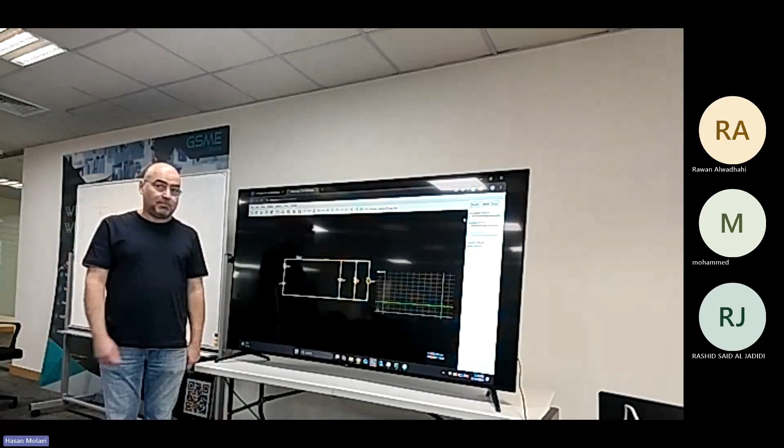But you can review the theory by yourself. Those calculations are supposedly creating the foundation for you to understand what's happening. And use the simulator. Play with it, to imagine what is happening. In your exam, I may suddenly come and give you a problem to solve on the simulator. You have to be able to learn.

Okay. Any questions? Is there any possibility to postpone the exam? I suggested let's do a mini exam on Wednesday. Based on that, we will see where we are. These exams are not for the purpose of rejecting you. The purpose is to basically give you a sense of where you are. Seriously. Everything that we have done. Everything. Not just that, everything until Wednesday.

So everything that you get tomorrow, Tuesday. It's not really an exam. Learn it in the class or on the same day so that you can answer the next. In the real world, when we are studying something for work, it's because we have to apply it now. It's not that we are saying, oh, I'm studying it now, so I can only answer two weeks from now. But learning it to be able to apply it immediately. Right? Okay. Any question?